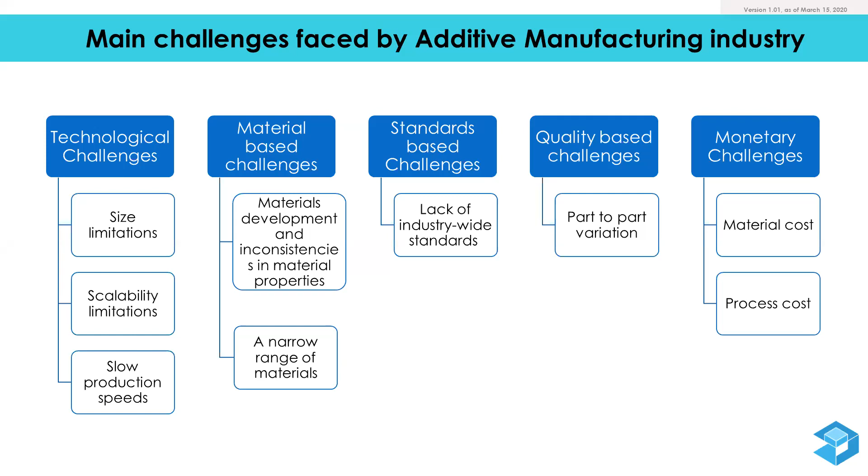So here are the main challenges faced by the additive manufacturing industry. We have compartmentalized that into 5 segments. Let's go one by one. First is technology being slow - as Deepa ma'am was saying, although they qualify the components, they need a supply chain established.

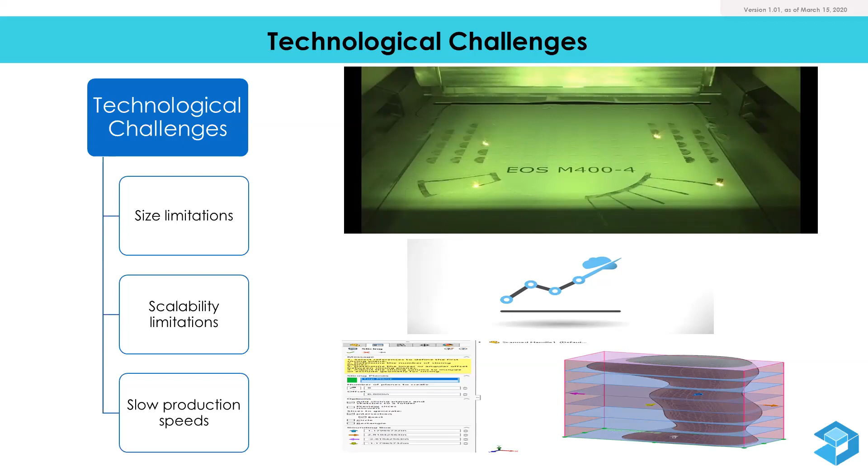So they need to work with production partners like us, because the process is slow. How the process can be improved, how speed can be improved, how those problems are being tackled - Ankit will cover that at the end of this webinar as well. But this is a persisting problem, that speed can be improved for the 3D printing process.

Second one is about material qualification. The choices of material, the way industry uses existing alloys with existing processes - we need to replace that effectively. Right now there is still a narrow range of materials qualified, more need to be qualified, and Deepa ma'am quickly touched upon this aspect as well. She developed one specific alloy grade for the gas turbine for high temperature applications and such.

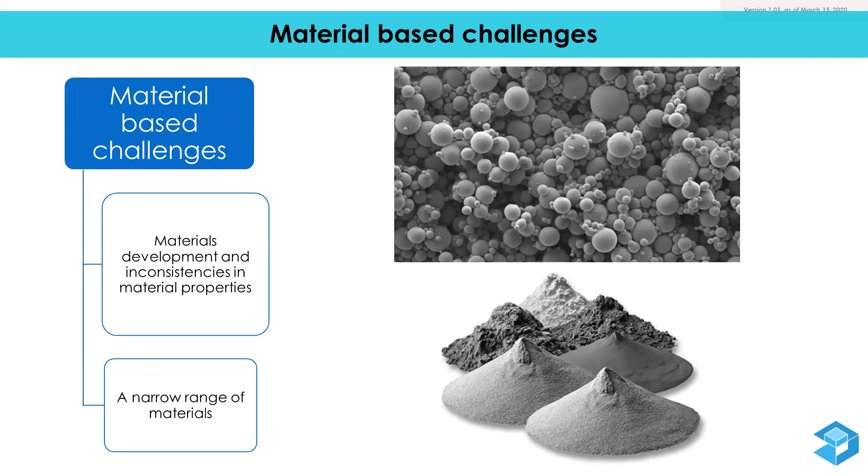Then there are standard-based challenges. We need empirical data, and Deepa ma'am mentioned there is a tremendous amount of data available that you can exploit, but it still has to be organized. When you are talking about casting versus forging versus CNC machining, there is so much empirical data you can refer to.

Each tool tip manufacturer, whether to choose high speed steel versus carbide tips, that sort of recommendation - what should be the feed speed, depth of cut - is very well understood in the CNC machining industry. Similarly in this segment, recommended parameter sets, how testing needs to be done, what quality you can expect, and standardizing that in an empirical fashion - those organized efforts are ongoing, and you can contribute on that front as well. So an industry-wide standard has to be there.

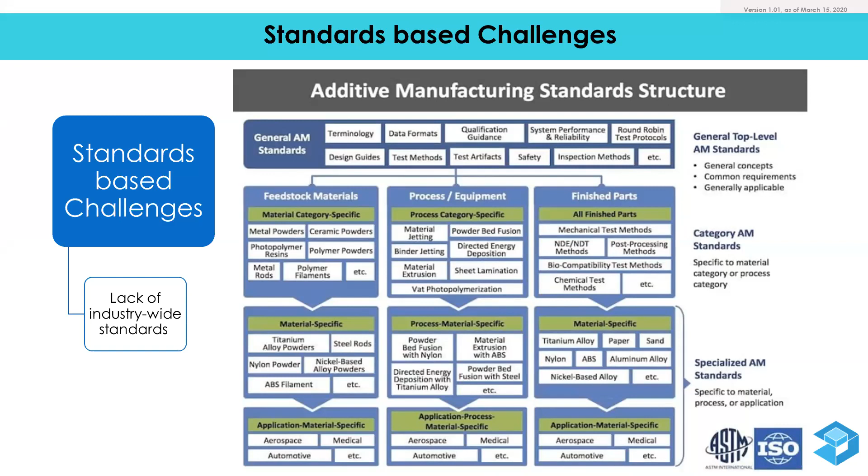Then the next challenge is about quality - consistency of quality part per part in the same build as well as subsequent builds. Each production run batch needs to have consistency and repetitiveness. That is something being tackled, but don't compare it to standard interchangeable parts like you get with CNC machining.

It's not just the aspect of geometry, because post printing, it's to be considered as an investment casted type of component, and you have to do finishing, machining and all. But where the quality variation questions come into picture is about material properties and how the strength is distributed amongst all the parts.

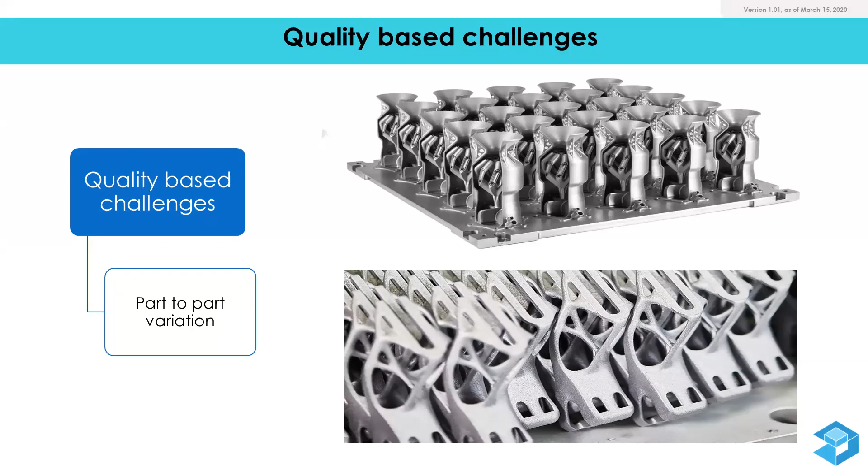So next is monetary challenges. Cost-wise, even though it makes sense for high value engineering aerospace applications where it's a boon that you can do lightweighting and solve industry problems, the rest of the industry like tooling struggle to justify the cost and returns on investment. So dropping down the cost comes into picture.

Right now the majority of raw feed cost is because of the specific physical properties needed for powder to be in a specific size and uniformity. Process cost is another thing - capital intensive machines, their depreciation, and runtime cost since the process is slower. How this is getting tackled, we will share.

Since there is a demand, people say necessity is the mother of all invention. So we will see first what the necessities and demands are. Right now I'm just enlisting challenges, then I'm going to go into demands and how the demand will dictate the inventions and new innovations that Ankit is going to cover.

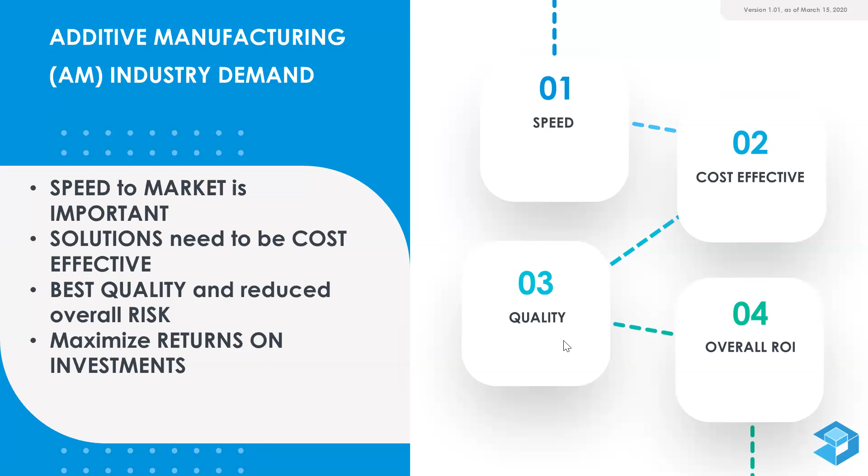Demand forecasted - I can show some charts and spend a few minutes over here. Looking at the US market, across science versus auto industry sector or healthcare sector, you will continuously see growth, almost exponential, with a compound annual growth rate factor in double digits. So that shows there is a pull from industry in all segments.

And where India stands, that's the pie chart I am showing. We need a lot of ground to cover. The US holds around 38 to 40% market share in terms of all value creation - machine manufacturing, powder manufacturing, end product development and use. They are leading the market, being the biggest economy, which is obvious. But let's see how others are doing.

Japan, Germany, and China are each sharing 10%, but a big economy like India is not even on that chart. The Eurozone countries sharing 4% each combine to 25% of market share, and a smaller island like Taiwan is also claiming 2%, while India is not even 1%. So we need to do a better job - there's a lot of potential to gain market share and put ourselves in the value equation.

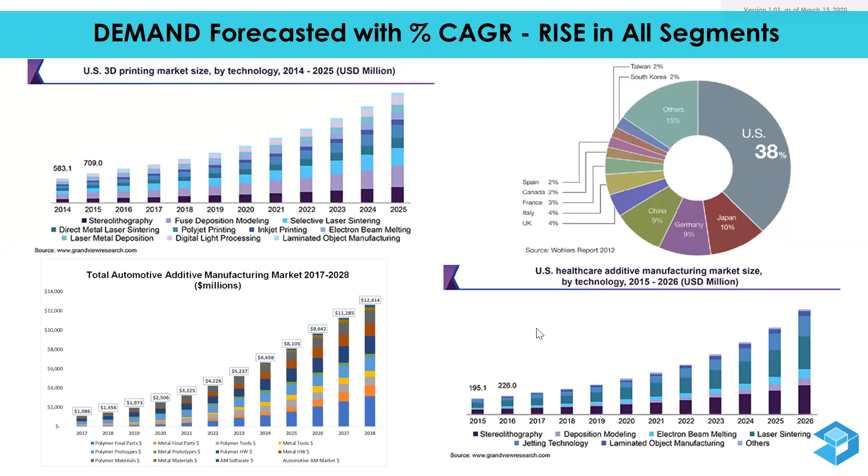People often pay attention to things like, oh, what makes you think our graphics hardware is out of date - these sort of conversations are common, where people associate value to mere liabilities like graphics hardware or PCs. Those are liabilities; real assets are people. So we need to develop the skills amongst people, and this PPT will be shared.

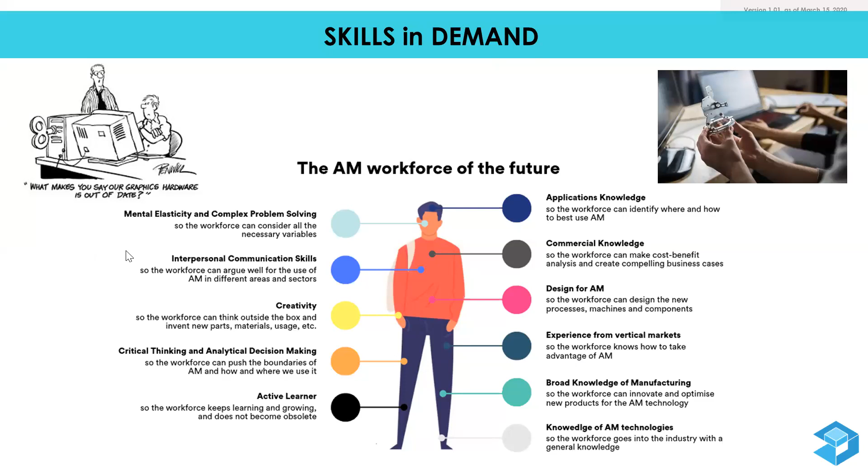So what opportunity has this technology been bringing? Deepa madam briefly touched on the current situation. In the case of the pandemic, where supply chains are disturbed and everybody is staying at home, companies like Pratt and Whitney are still quickly able to manufacture certain high value life-saving items for local consumption. It can be low value, but now it's high value, because something like a disposable mask - nobody assigned it a tremendous value before.

In our industry we use and throw it away every day, because we need to protect ourselves with personal protective equipment when handling certain powders. Nowadays it has become the talk of the hour, and companies are able to still meet demand irrespective of disruption in supply chains, because of the use of technology - novel flexible automation and direct digital manufacturing. Because of that they can locally produce it. That's a big enabler.

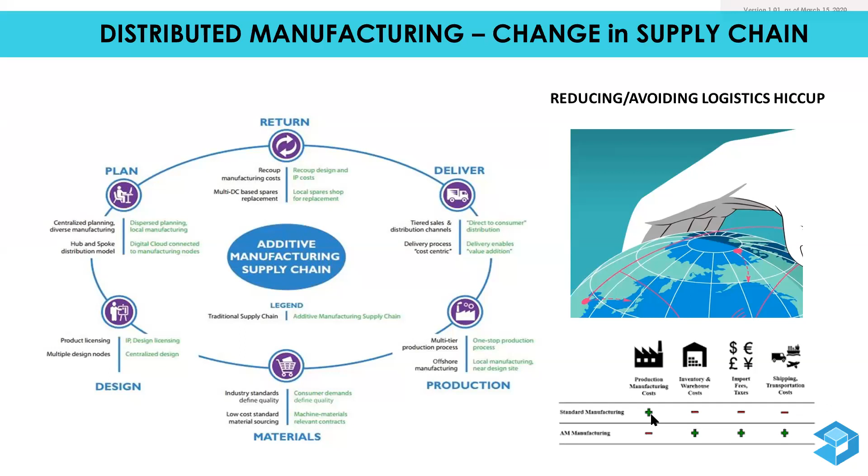Okay, let me move on. What are the big enablers that are going to transform the industry and where can costs be reduced? Powder manufacturing has to occur in the local economy. Right now in India we have to import certain special grades from overseas. So fast development of compositions is important, and there are different technologies.

The best possible option is plasma rotating electrode technology, which gives perfectly spherical powder particles, desired by each technology. That is the best, but it can be overkill for just blown powder or direct energy deposition - this quality is not essential there, because this type of spherical powder quality is essential in laser powder bed fusion technology, the one we use, where you have to deposit a uniform layer robustly, so flowability comes into the picture.

But for other technologies you can use coarser sizes, and that sort of manufacturing has to occur in India. If somebody listening to this webinar is from Tata or a major player like Tata, Jindal, Ispat Steel, or someone of that sort, they should take note that this is a huge demand, and foreign players are winning in this segment - establishing capability, investing in this domain and making profit out of it.

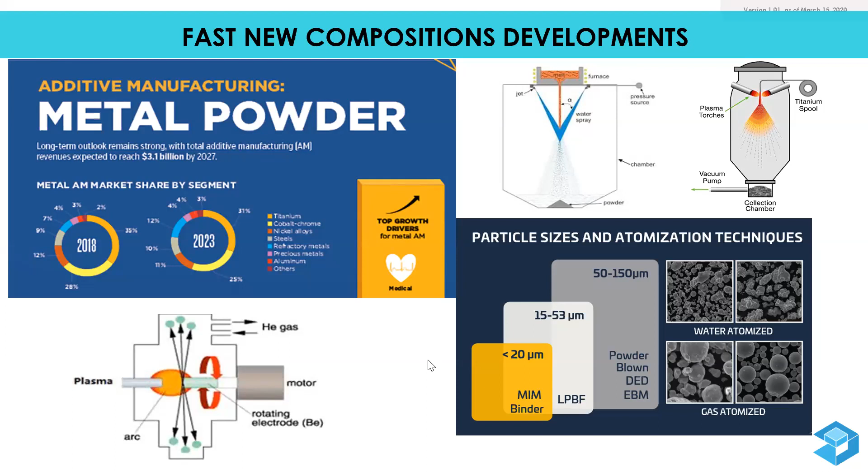So that's what, once the qualification phase is over, you need to convert on a faster basis and deliver the industry demand within time on budget. So who is going to make that?

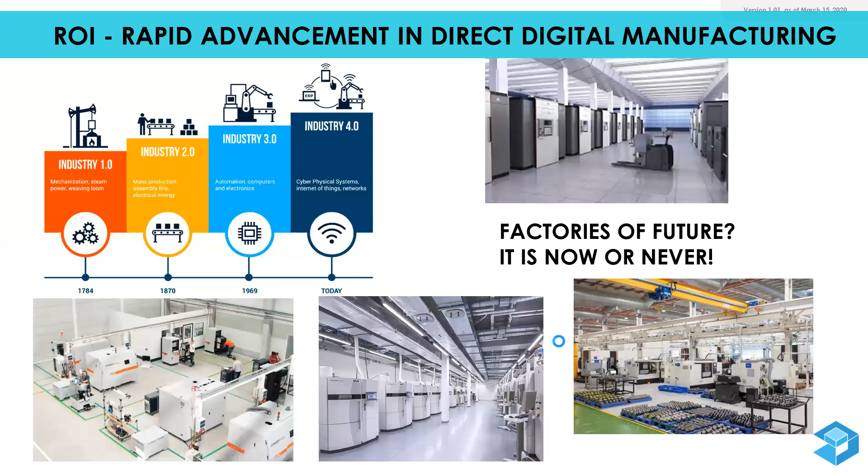And they are going full swing on this technology to adopt it. And of course, there is a return on investment that they have realized, and it's now or never. So let's go to the third poll now.

And then Ankit will pitch in for the last segment of how these demands are tackled with the advancement in technologies. Okay, can you stop sharing?

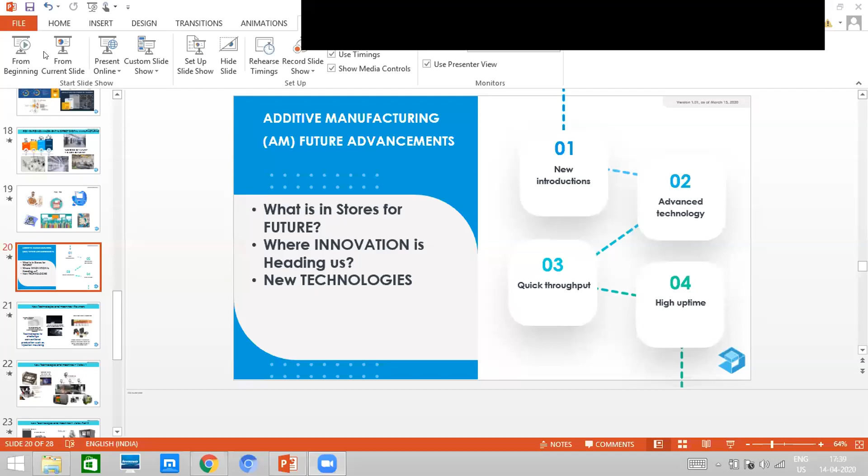Ankit, we can see you. So yes, Rahul was explaining about the challenges, current challenges, and current mindset about the technology itself. So here I just wanted to talk to you about the new upcoming things.

So that is very important because the technology is not multiplying just like Moore's law, it is not going 2 to the power 3 or something like that, and it's not like PCB manufacturing technology either. But it is increasing. The major thing has been the good feedback it has been getting from the end users and the exact requirement from the users themselves and service providers like us - the software manufacturer, the material manufacturer, and the machine manufacturer. All of us are working together on this, trying to solve problems for our end users, like Deepa ma'am was mentioning about something like this.

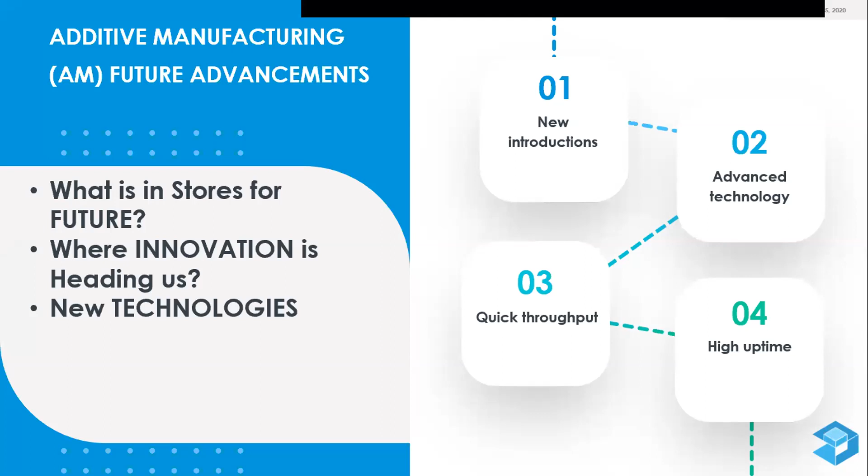So now I just wanted to talk to you about the new introductions, the advanced technologies, the talk about quick throughput and high uptime, which is very important, as in Rahul's last slide about ROI.

So I want to talk to you about the polymer side initially. Currently, in the Q&A, there were questions about what level of end-use component can be produced through polymer additive manufacturing technologies. Right now, these are 3 technologies which are quite exciting for Objectify.

So I just wanted to give you an idea of where Objectify is in terms of introducing technologies like these. So FDR is fine detail resolution - in SLS technology itself, such fine details as you get in DLP or in SLA can be achieved. So something like this is a new upcoming technology. The properties and the finish will be equivalent to injection molding itself.

So EOS is also coming out with a LaserProFusion technology. That technology has 1 million lasers on its recoater itself, so just because of having so many lasers, while having a pass over the layer, it will be melting - saving a lot of time of melting, recoating and melting again. What EOS is claiming is you can make multiple copies in a matter of hours. So it is something which is a challenging thing for injection molding, and this is the future.

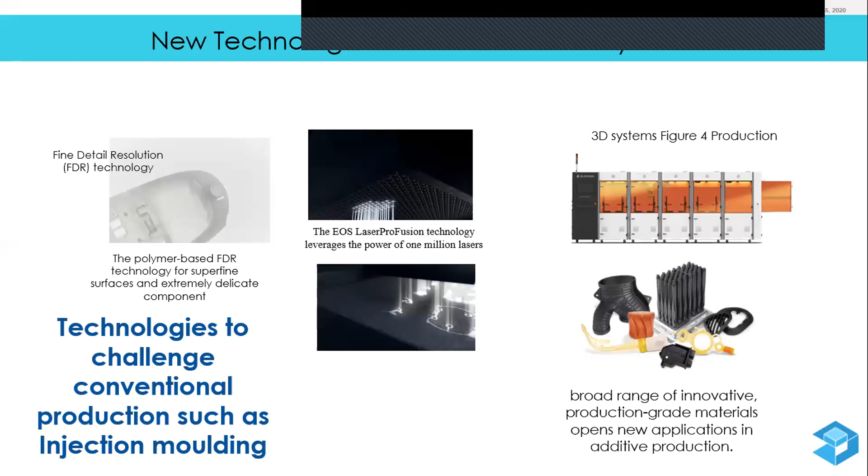So productivity, ROI, and good materials is the future on the polymer side, or any other technology. 3D Systems is also coming out with a Figure 4 production line, which has varied talks about the materials and applications of the materials. Here also they are trying to challenge injection molding with certain technologies producing polymer grade production materials. Something like this is a good way forward in the technology side.

So we are also on the lookout for them - every 3 months or 6 months you get to know of a new launch coming in. It has been quite an exciting time to be in an industry which is increasing by 20 to 25% every year. On the metal side, these are some of the technologies which are quite exciting. As one of our speakers, Deepa ma'am, was talking about - DED, hybrid manufacturing technologies, and WAAM are quite widely accepted technologies currently for blown powders.

So they are exactly talking about how to use wire feed for making larger components. Boeing has come out with a thought that by 2030 they will be utilizing WAAM as a technology for making the fuselage of their aircraft itself. Something like this is the future, and right now not too much research has been done, as the equipment cost and implementation is quite expensive, and there's a huge learning curve. People should have a certain background of welding and understanding about the material itself, so it is a bit of a different requirement.

Then comes the hybrid manufacturing technologies. During my undergrad, the gentleman who started hybrid manufacturing technologies was one of my tutors at Warwick, and he started this company where he can change the head of a normal CNC machine, so it can be a 3+2 or a 5-axis machine. You can just change the head and add an AM bit, which can do additive manufacturing, and in the same machine you can do subtraction and inspection. So on the tool changer itself, you can have an AM head. Something like this has been widely utilized by companies like Mazak, DMG, and Beam.

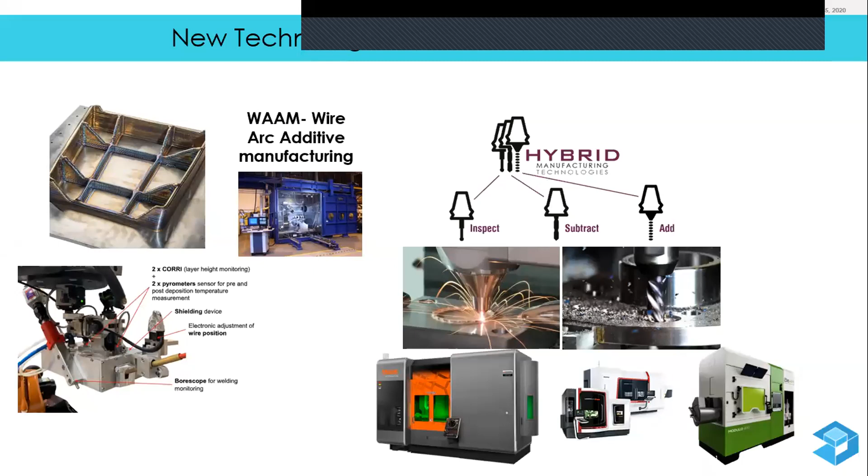I can tell you, at MTC, the Manufacturing Technology Centre at Coventry in UK, there is a 20 kilowatt laser which melts and was repairing a submarine vessel itself, and they have been doing something like that for a very long time. But something like this for a country like India is something which we have to push forward, and we have to engage better with the government and better with the community itself. So these are futuristic technologies, and which are the need of the hour.

Then comes the new technologies on binder jetting. As ma'am was telling about desktop metal, this is also one futuristic way of making components on a desktop level, and it is something which will change the course of metal 3D printing itself. There are three companies who have already announced certain equipment: one is HP, one is Desktop Metal, and the third one is Metal X from Markforged. They have been talking about these equipment for a very long time, and they have been getting a good amount of traction from user industries and from academia. When academia takes your technology really seriously, it will be a serious player in the future, and academia is right now working with these technologies.

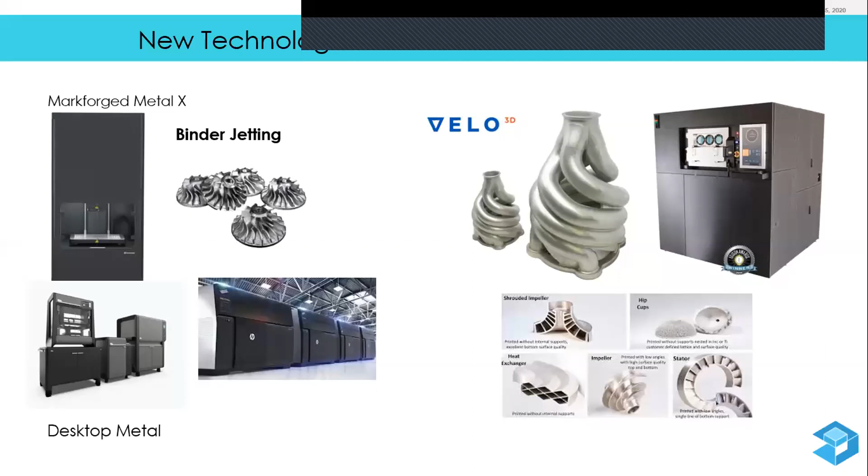And comes the talk of 2019. If somebody is asking who's the rock star of 2019, who made a lot of noise in the industry itself, it was Velo 3D. Currently they have partnered with Honeywell, and they claim that they can make components without support. That is something to look out for, and something we are also keeping our eyes very close to. Because if that is avoided, then the presentation what Rahul has done and I have done becomes redundant, and things will be much more easier for all of us. So something like this is a move forward, and we are also on the lookout for something like this. Velo 3D is something coming up, and we are keeping our close eyes on something like this.

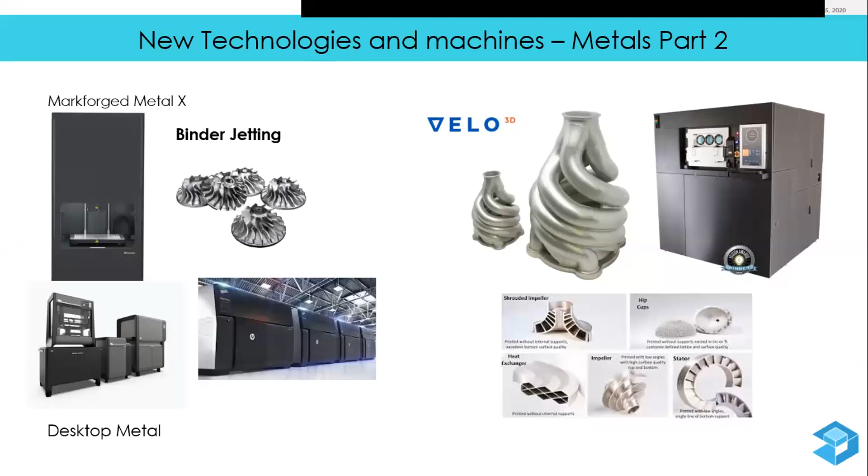Then surely, as you might have noticed, the major thing has not just been on the machine side, not just also on the material side. Mostly things still evolve around the software and the kind of things you utilize during the designing phase or data preparation stage. So again, I'll say that same jargon again: garbage in is garbage out.

So as you are designing, as well as simulating, you have to maintain that level of understanding of the component, understand the application, understand what kind of material you're using. That's why you can see a cycle down below where we are trying to explain that from simulation to orient and support is the black art.

Right now it is very much an experience-based approach, but it should be a very scientific level approach. So software like Simufact, Atlas 3D, and nTopology comes with certain solutions like this.

nTopology is a very good software for generative design and new age designing software. The good part about nTopology is it produces the drawings directly for a printer. You don't have to change the environment again and again, going from STEP to STL or something like that. You can directly put it onto your machine itself.

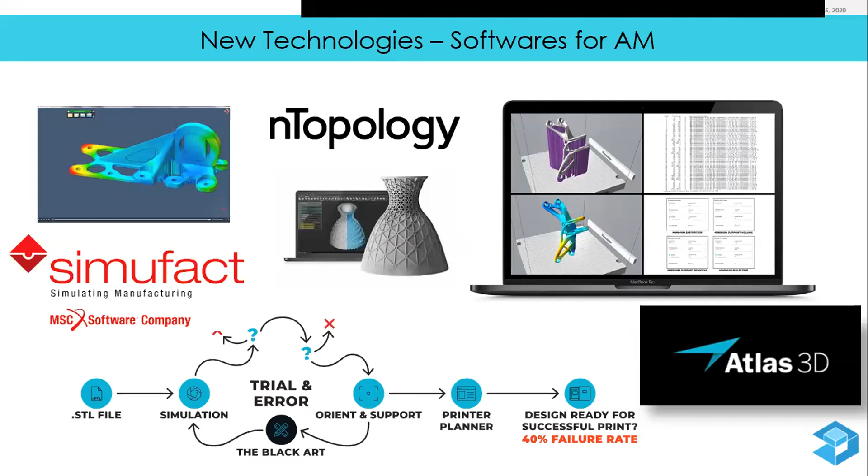So something like this is a futuristic thing where you're mitigating as much failures as possible. That is the move forward in the industry itself. So I would like to move forward.

Earlier, Mr. Rajesh Khanna was supposed to attend our webinar, but due to his prior engagements, he has not been able to be present at our webinar itself. So I'll just give you a short brief of our journey with Mr. Rajesh Khanna and his organization, TVS Motors.

As I had told you in our third webinar about our transition from BS4 to BS6, TVS was also one of the enablers of that approach, and we were able to serve better. It comes from a customer's perspective, how to implement a technology like this. The confidence of a user like Rajesh sir has been a great help for a company like us in implementing the technology at an automotive level.

So today with us, Mr. Anil Kumar from ISRO is present. I just wanted to introduce you to Mr. Anil sir. Anil sir, can you hear me?

Hello, yes sir, Anil sir? Yeah, hello. How are you, sir? Yeah, good. Hi Ankit, thank you for joining us, sir. Yeah, thank you for inviting me. Actually, I consider it an honor to be along with Dr. Deepa ma'am, whom I consider a veteran in this area. Exactly. So in that aspect, I'm a novice actually in this journey. Yeah, but still, okay.

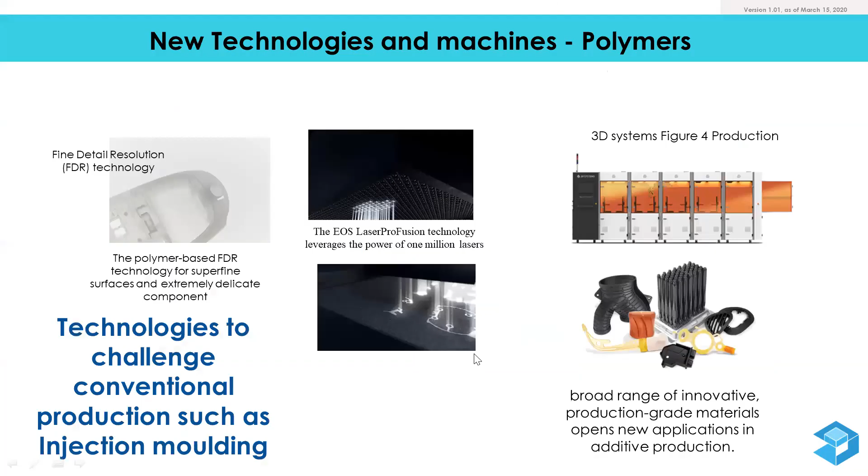I presume it's dispersoid powder, I'm not able to see the spelling. Okay, does dispersoid powder help to enhance creep properties for high temperature aerospace applications? I'm not sure I understand this question, whoever has asked, can you please translate it? What does dispersoid powder mean? Actually, the same person was asking about creep properties in high temperature aerospace applications, something like at the turbine level, how it can be utilized. No, but what is this powder? If we can just answer on the high creep temperature properties, creep?

Well, it depends on the material. Let's take Inconel 718 again. If you're going to use powder bed fusion and do an AMS 5664 or whatever SAE specification you have for solution and aging heat treatment, you're able to get a microstructure very similar to a wrought structure in an ostensibly cast part. Remember, any type of additive manufacturing, laser-based or electron beam-based, you're building layer by layer, essentially casting and welding, except you're doing it at such a high rate, of the order of a million degrees per second or a lakh degrees per second, that you may tend to have non-equilibrium structures that can come up.

So in terms of creep, again it depends on the grain structure. Fortunately, materials science and engineering allows a three-way approach where you can tweak the heat treatment to actually change the structure, which in turn affects the properties. I won't be specific, but I'll give one example: you can use non-equilibrium structures, and we've seen this in practice in a cobalt-based alloy, where you make judicious use of heat treatment with inputs from metallurgists and materials engineers, and you can actually make it better than even a cast part.